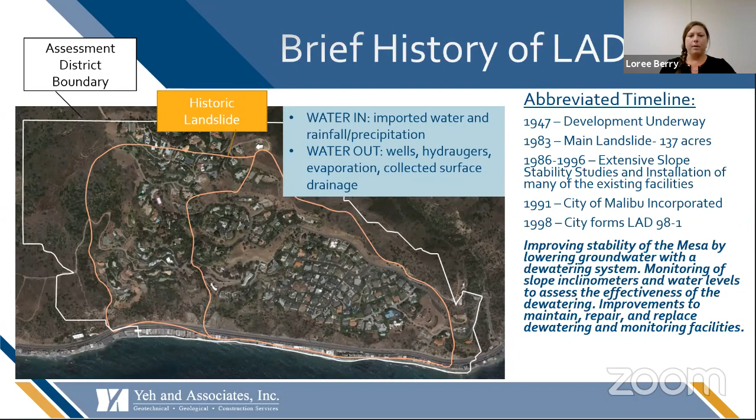A good point is that the whole idea of managing this landslide is controlling water in versus water out. The sources of water coming into the region are imported water and rainfall or precipitation. The ways we dewater and get water out of the assessment district are through dewatering wells, hydraugers, natural evaporation, and also surface drainage that's correctly and properly collected and taken down into the storm drain system.

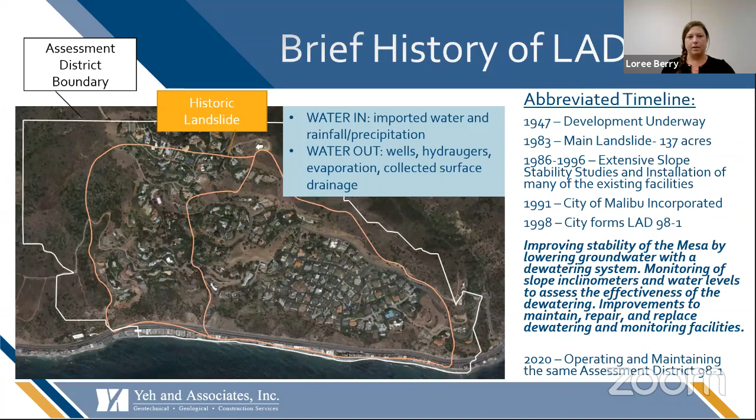Here in 2020, we are still operating and maintaining the same landslide assessment district with those same goals and purpose.

As Rob mentioned, Yeh was hired through a selection process through the city of Malibu and began our work in late June 2020, starting July 1st.

To that end, what we do for this project is monitor and measure the dewatering output. We measure the water levels throughout the district, survey the slope inclinometers, maintain and repair the equipment, and replace equipment under our allotted budget for capital improvement projects.

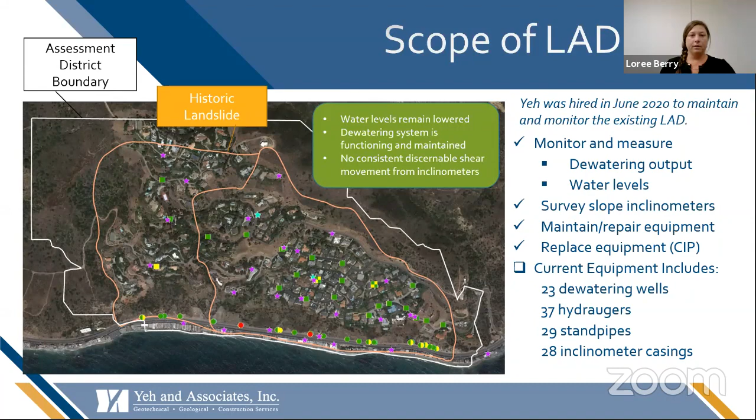Our current equipment includes 23 dewatering wells, 37 hydraugers, 29 standpipes, and 28 inclinometer casings. Based on the work we've performed and the data we've reviewed since coming on board, the water levels remain lowered, the dewatering system is functioning and maintained, and there's no consistent, discernible movement in the slope from the slope inclinometers.

We've been really busy - a lot of research, a lot of data review. We've been hiking through the district collecting information, not only to wrap our heads around this project, but also to provide responsible, educated answers to your questions and to keep maintaining and monitoring the project.

In these last few months, we've recorded the flow from all the wells and hydraugers, and measured the water from all the standpipes. We've done that for three months in a row per our contract - that's part of our scope of work every month, to do that basic measuring.

We also have to take water quality samples and submit them for environmental testing to comply with an LA Regional Water Quality Control Board NPDES permit, which has to do with the discharge of all the water coming out of the dewatering system and discharging it into the ocean.

So that is permitted by LA County, and we have to follow strict testing protocol to be in compliance with that permit. We also performed baseline surveys on the inclinometers.

We performed an inventory of the existing facilities. We've scheduled maintenance of some hydrauger conveyance lines that need repair along the PCH, and we've completed maintenance and repairs on up to 10 different dewatering wells. Those repairs are all part of the maintenance budget of the existing assessment district and within our scope.

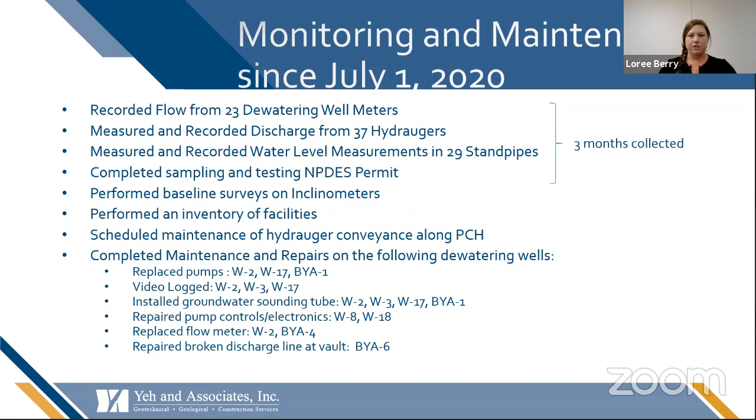So now I want to go through the results of our data collection and share some of the data trends that led me to the conclusions I've stated, and I'll state again, about the function of the system and the water levels.

So first I want to talk about the sources of dewatering coming out of the Big Rock Mesa. There are 2 different sources: dewatering wells, which are an active system that uses a submersible electric pump to lower and maintain the groundwater levels within an area surrounding the dewatering well.

Hydraugers, on the other hand, are the pipes you see sticking out of the bluffs along PCH. Those are a passive system, a horizontal perforated drain that's drilled into the hillside. When there is water around the drain, it comes out, but there's no active pumping - it's a passive gravity flow system.

What I do want to emphasize is that there's been trends over time showing less water is being discharged now than at the beginning of the landslide assessment district, but that does not mean the system is not working. In fact, when water levels decrease in the dewatering wells, it means there's less well surface area below the water table, so there's less area to recharge the well, and less dewatering volume coming out. That's a perfect example of water levels decreasing in a well while the dewatering volume lowers even though those water levels are being maintained low.

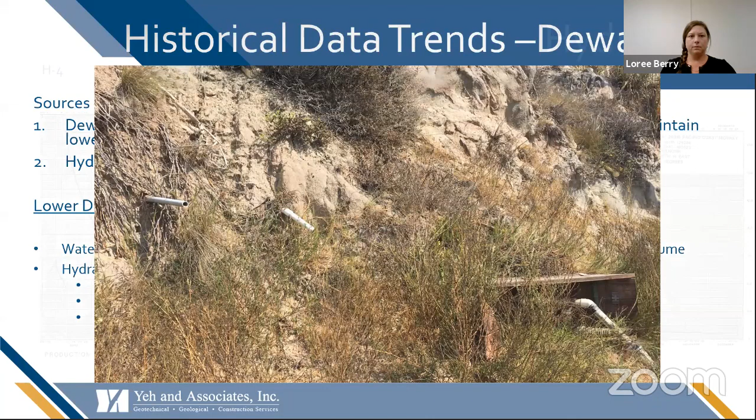Here I want to show some really interesting information. These are two examples of what I was talking about, where shortly after the hydraugers were installed, the production of water coming from it diminished very quickly.

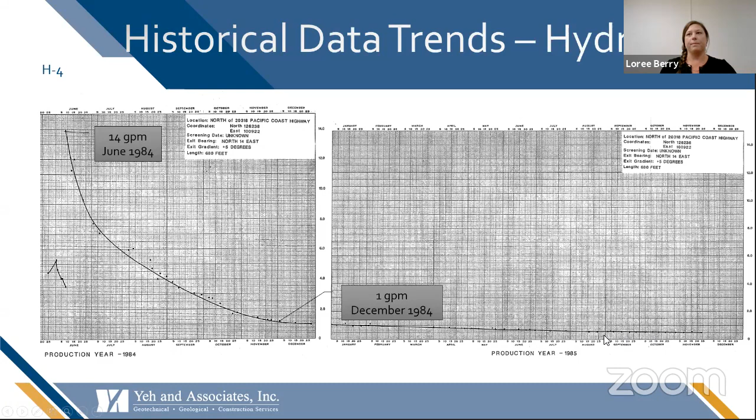This is H-4, a hydrauger we still monitor. It was installed in June of 1984 by D.A. Evans. At the time it was installed, it was pumping about 14 gallons per minute, even higher at the very beginning. Within 6 months, by December 1984, it had decreased down to 1 gallon per minute, and steadily stayed that way for the next year. That's still how it produces right now. So again, a very quick decrease after installation, a lot of water coming out of a confined area, and now it's just steadily in a low flow condition.

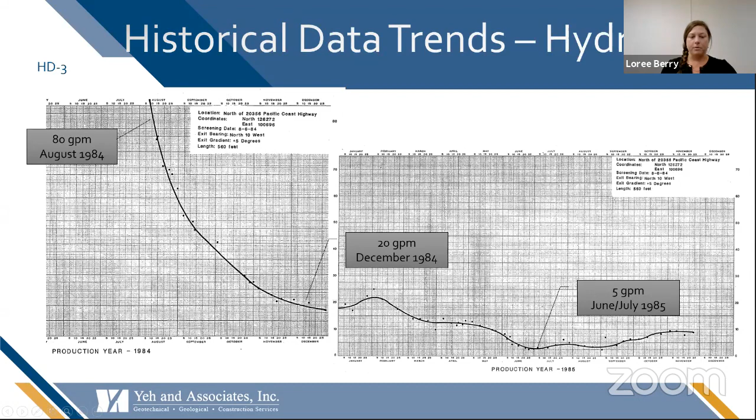I just want to show one more example of that. This is another one we still monitor, HD3. Again, very high, 80 gallons per minute when it was installed in 1984. By December, less than 6 months later, it was down to 20. This one shows an example of how some hydraugers are reactivated in response to rain - these little bumps are likely in response to different rainstorms. It goes up and down, hit a low spot of 5 gallons per minute, and this one also just stays low, like most of the hydraugers are relatively low flowing.

Another set of data that we look at is the trends in the groundwater levels. Reviewing the groundwater level data along with the results of the slope inclinometers is really our best tool right now for assessing how the system is functioning and where and how we should improve or repair things.

This table is a summary of some of the dewatering wells and standpipes. I took kind of a scatter across the district, and selected several within each subslide area, just to make the point that water levels when these were installed in the 1980s were very high, and they've continued to lower, and they're still lowered. As an example, in 1983 well number W1 was installed, and the earliest reading we have from 1983 was a depth of 63 feet below the ground surface. Now we measured it just last week and it's 125 feet, and that's consistent across the board.

With many of these facilities, you can see that they've decreased from their original water level at install to current water level. Some of them over 100 feet, 150 feet.

I also wanted to add that we took the time last week to take these water level measurements with the pumps turned off. By doing that, we wanted to see if there was much influence of the water levels with any nearby pumps. What we found was that we had readings from September for our monthly reading and compared them, and they're very similar. So in general, we don't see a significant difference with the well pumps turned off, and these numbers do represent a condition with those off.

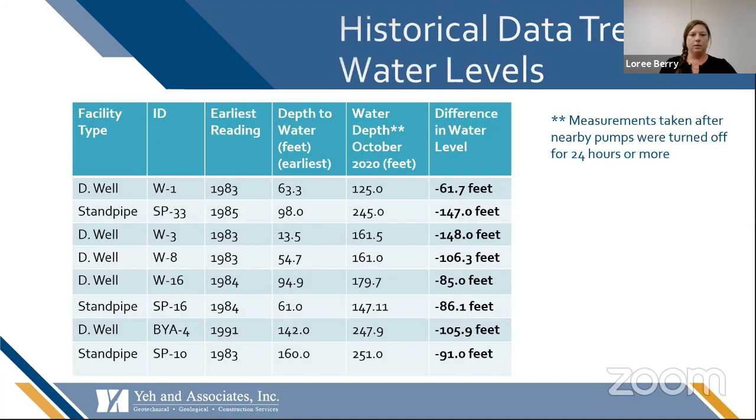Now we're going to start talking about - so I just talked about the two sources going out of the Mesa, the dewatering and the water level, or the two types of dewatering, and how we evaluate those by looking at the water levels. Here's another summary of one of the inputs to the system.

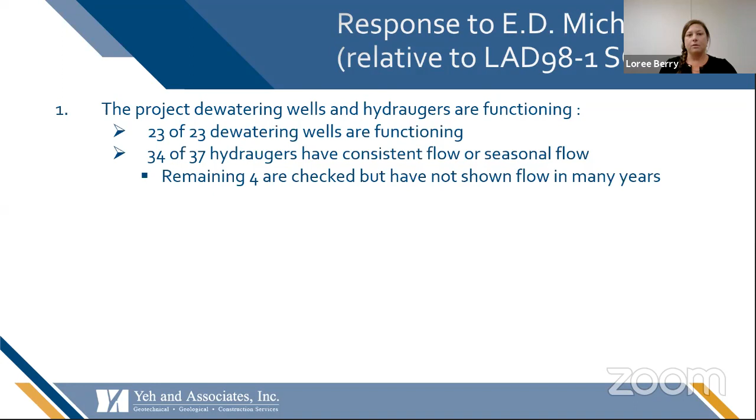The groundwater level measurements in the standpipes and within the dewatering wells, where we're able to get a measurement, indicate that the 2020 groundwater levels are well below the 1980 water levels before the slide activated, and are near or below the 1991 water levels once the initial dewatering systems were in and running.

Lowered dewatering production combined with the lowered groundwater levels tells us the dewatering system is functioning. In 2019, water usage is very similar to the water usage from 1984. And the slope inclinometer data does not reveal a consistent pattern of discernible shear movement.

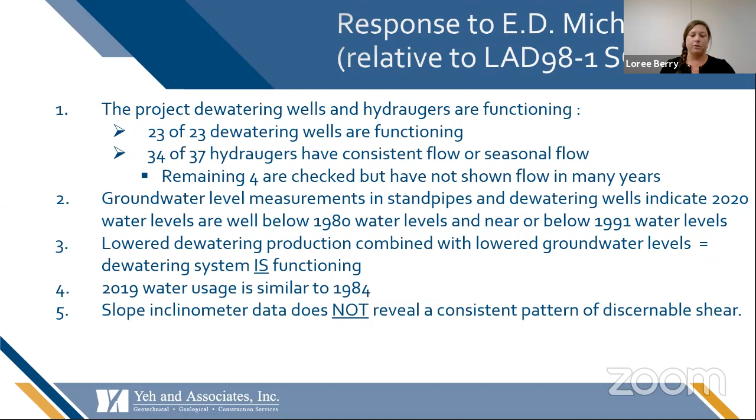So our next steps, which we will be implementing within our existing scope of work and budget, are to continue our monthly monitoring as needed, maintenance especially with the winter and rainy season coming up. We'll be keeping a close eye on any potential issues or repairs that are needed and address them as soon as possible.

We will maintain compliance testing and reporting for the LA Regional Board permit. We want to install pressure transducers in 6 locations.

This is going to come out of our CIP, our existing capital improvements budget. We want to do this so that we can continually monitor the groundwater levels through this next rain season, and it's also going to help us interpret whether some of the readings we're measuring are from a wet casing or an actual water level.

In the past, by just using a water level sounder, there's opportunity to get some erroneous readings, and there are several wells that are sometimes difficult to get good readings at. So those are the locations where we want to put these pressure transducers, so we can get a real, true groundwater level and a continuous level.

We'll be able to see changes from rain events and how the water levels react to those, and also the dewatering pumps, how they react to that.

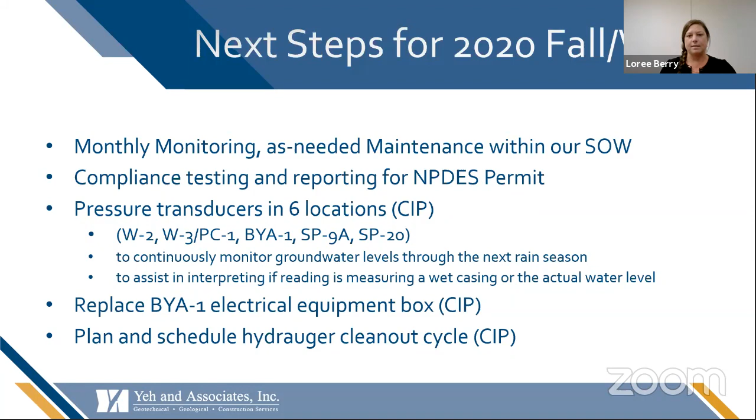This clean-out is just a maintenance item that's supposed to occur every few years, where we essentially jet clean out the hydraugers to remove some of that calcification and scale that builds up on them, so they have more opportunity to produce water.

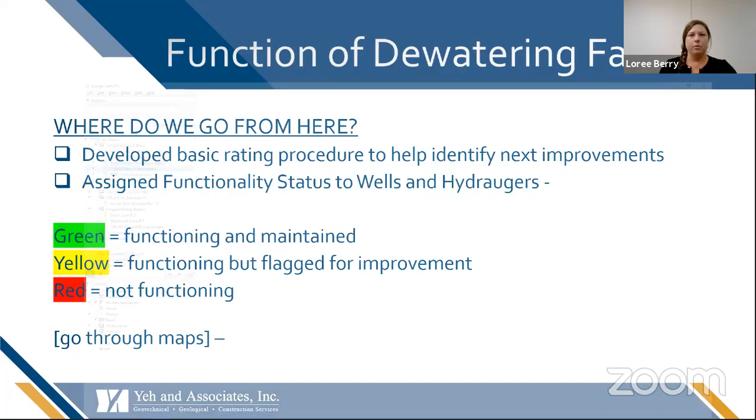So where we go from here, it's still kind of difficult to assess where and when and how to do the improvements. So what we did to help us was develop a basic rating procedure to identify where we want to make our next improvements. We've assigned a functionality status to the different wells and hydraugers. I'm just going to quickly go through this, not in a lot of detail, and we can go over it more in questions.

I've switched over to a Google Earth screen. Here I have the outline, and you can see our aerial view of the Big Rock Mesa. The white outline is the assessment district boundary, and the orangish line is the extent of the 1983 slide maps.

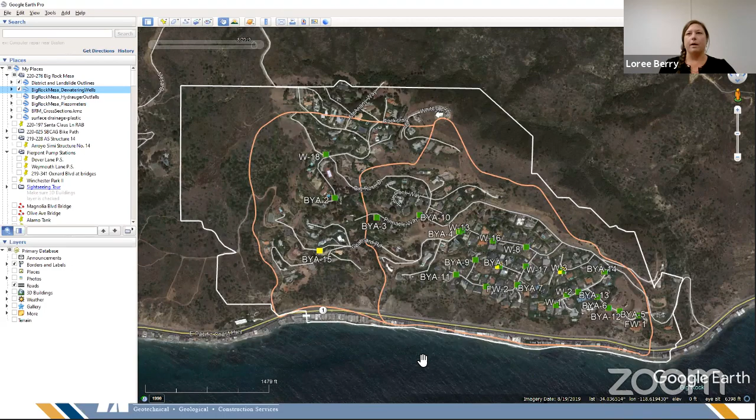And here are the 23 dewatering wells. They are color-coded green, yellow, and red. As you'll notice, there are no red because they're all functioning. Most of them are green. I'm going to first point out the yellow one.

BYA15 is a dewatering well in the Western Extension that was installed in 2002, and it's yellow because it historically hasn't produced much water, yet it was originally installed because of some concerns of water levels rising in this general area. Data shows that this area still has lowered water levels, but the pump is currently working in this dewatering well, it's just that the water level is below the dewatering well.

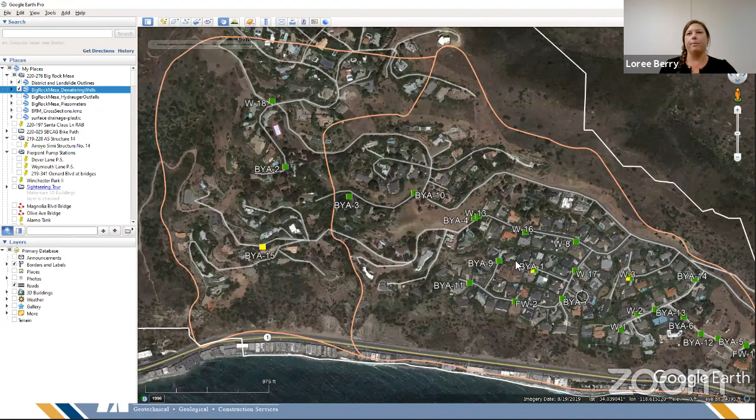Monitoring well BYA1 and dewatering well W3 here are kind of a checkered green-yellow. We did that because they are functioning, they have pumps that are running and they work, but they are flagged for some improvement. Both of these wells, based on our data, could be replaced with deeper wells so that we could dewater even further.

Right now BYA1 is pumping regularly. W3 hasn't had much production recently, but we have confirmed that the water level is right at or just below the pump intake.

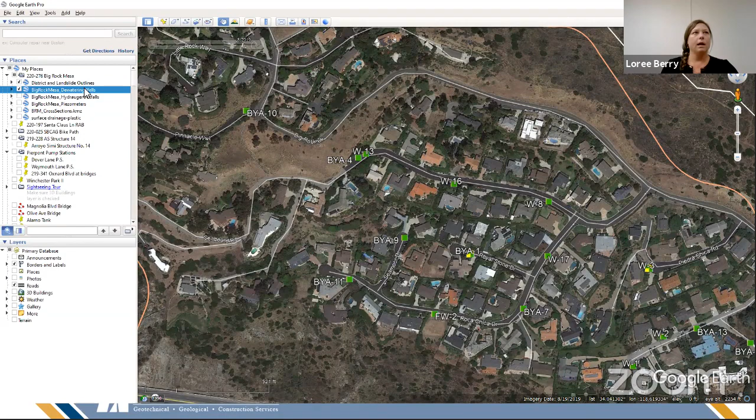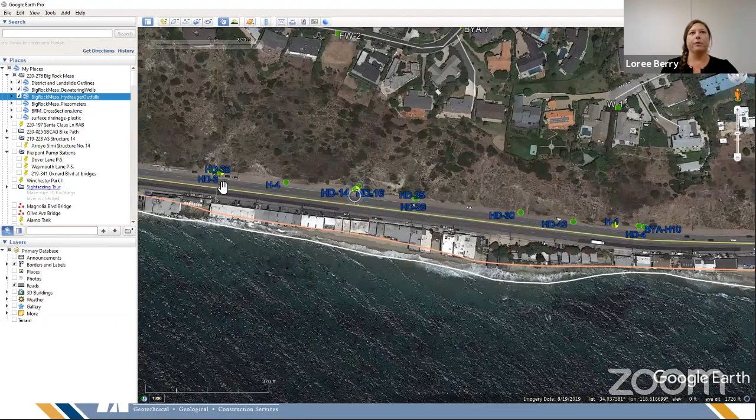Similarly, we did the same thing with the hydraugers, noting them as green, yellow, and red. The red ones are the 4 that really haven't produced in a long time, and we're keeping our eye on those. Some are green, producing really well and consistently, and the green-yellow ones are first in line for getting a hydrauger clean out because they produce periodically or intermittently, and maybe that can help improve them.

I want to point out that with this whole interface, we're working on a GIS interface where eventually, we're just kind of getting started, but I hope I can send you guys a KMZ type file from Google Earth, and you'll be able to click on these different points and get some basic information, the recent water levels and such, that we're trying to implement along with our other program.

So I'm going to go back to my slideshow. I'm going to go through a few facts about our 10-year capital improvement plan.

Some facts about our existing capital improvement plan: we currently have about $100,000 a year set aside for hydrauger clean out, major rehabilitation, or replacement of a dewatering well, hydrauger, or inclinometer. The costs of doing these types of repairs has skyrocketed, and you cannot do nearly as much as you could back in 1990, or even before that in the 1980s, when a lot of these original facilities were installed. Based on current pricing, we can really only do about 1 to 3 major improvements, about 1 improvement every 1 to 3 years based on this $100,000 budget.

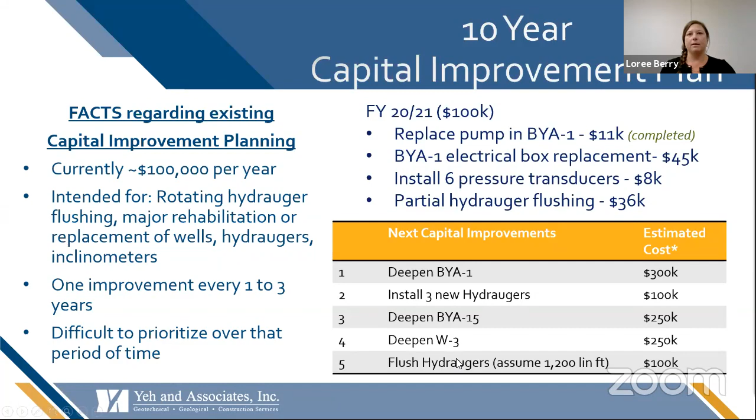So the cost to maintain the district is growing, and we can't do what we could do 20 or 30 years ago with the same budgets. We recognize the system is functioning and working, the dewatering and groundwater levels are maintained and lowered, but we do recognize there's room for improvement to enhance the system, to implement a better monitoring system, and to also implement newer and state-of-the-art landslide technologies.

I'm going to go through each option and provide the benefits for adding funds to the assessment district budget. I've listed these in order, where A is essentially what we feel is needed, a recommended approach. B and C are very important, and we would like very much to implement them — they would be a huge asset to the assessment district. Then going down into C, D, E, we start getting into improvements that would be really nice. They might reduce some labor or introduce remote capabilities, but they're not necessarily required to maintain the system.

So I'm just going to go through each of these one by one and share the benefits.

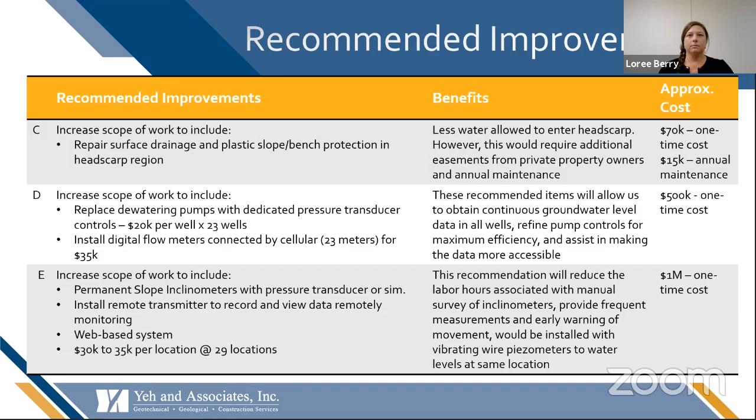October 12th is when we are going to be introducing this presentation and providing these recommendations to council, to give them direction on what to do moving forward. There could be some other recommendations coming out of those questions.

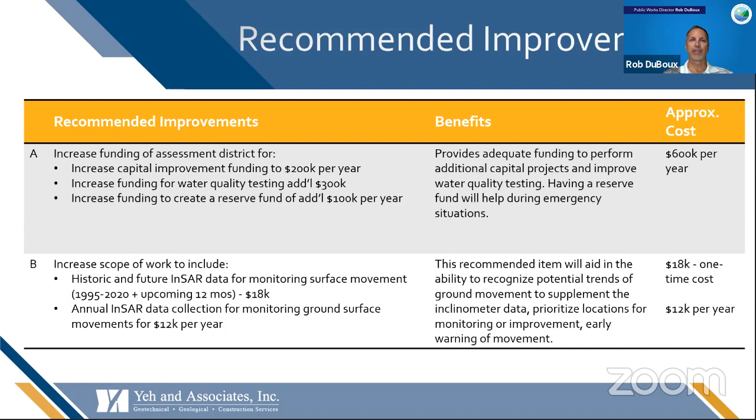We've received some written questions, and after she reads the questions, Loree, myself, and I think Nick is on here too, will be answering those questions. But just want to point out that if there's any questions not related to the assessment district and the dewatering and everything, we're not going to be answering those questions because those are related to the presentation and the information we're going to talk about today.

So with that, Brandy, do you want the first one? Yes, I'm ready, go ahead. The first question that was submitted is: what effect does the state of the drainage swales that are deteriorated and full of rocks, boulders, and brush have on the stability of Big Rock?

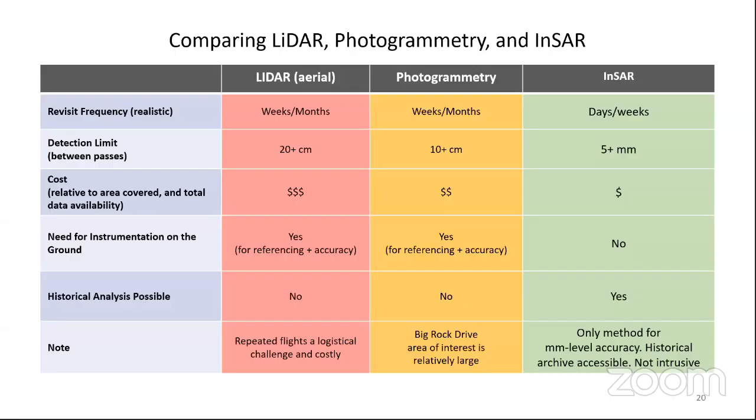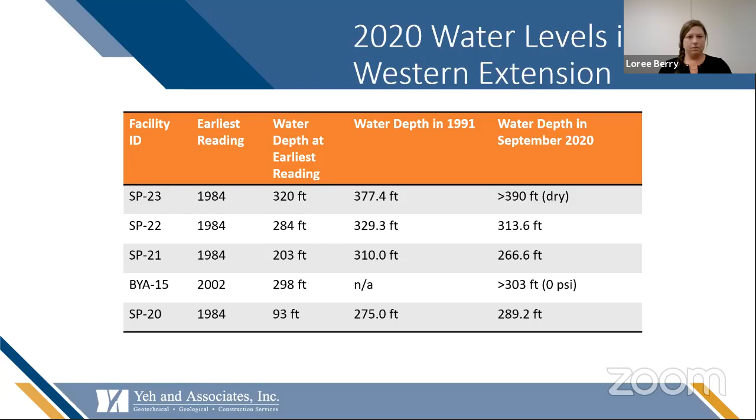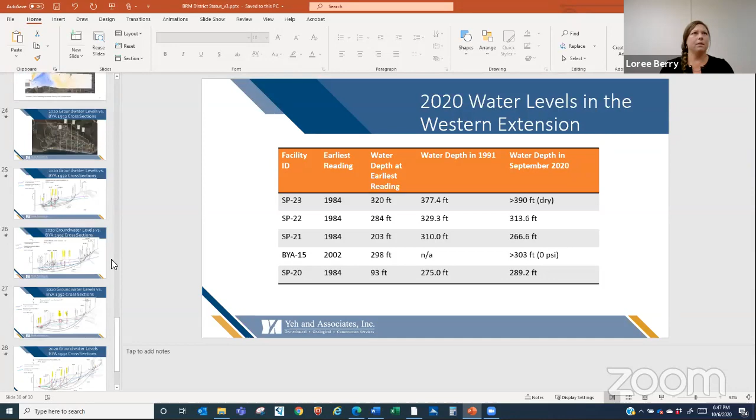Sorry, I touched on the concrete drainage swales, and they are part of our recommended improvements.

Currently, the concrete drainage swales and plastic protection within the headscarp region are not part of the existing landslide assessment district scope of work and facilities. Water entering that land area during periods of heavy rainfall is not favorable to the stability of the landslide. However, we are a little less concerned about the rocks, boulders, and debris, and more concerned about repairing the plastic sheeting on the slopes and terrace benches. It would be very advantageous to reduce the amount of precipitation entering the headscarp, and as I mentioned, it is part of our recommendations for improvements with a readjusted assessment district.

Next question: how many wells and hydraugers were not functioning at high levels when you inspected them? Are they now fixed and running at their full capacity potential?

Well, I want to first say that, just like a car coming off a car lot, a brand new car, a dewatering well or a hydrauger, any of this equipment, the second it hits the ground is not at its full capacity potential. There are so many variables with these types of facilities.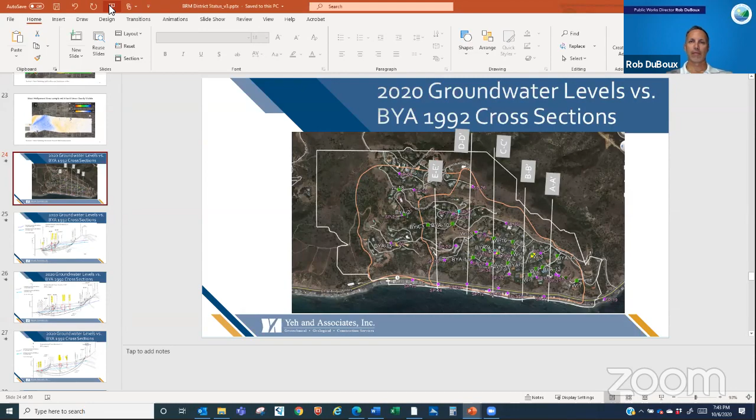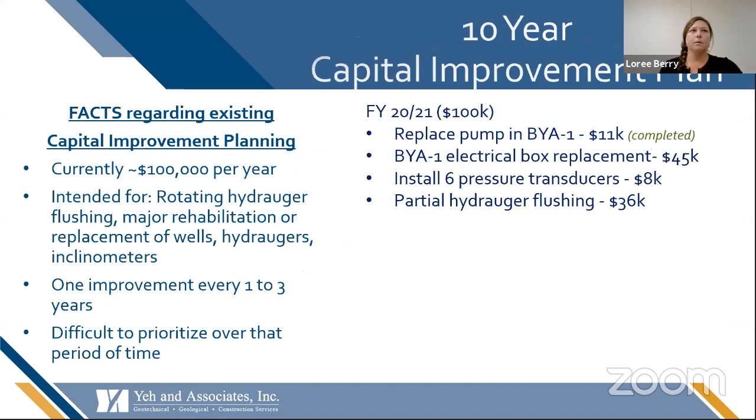Rob, I think this might be a good opportunity to share those cross-section slides. If you want, yeah, I'd like to share my screen again. That's fine, you should be able to. Just give me one second. Oops, sorry. I'll show you guys that too.

Slope stability — the dewatering has everything to do with slope stability. Slope stability evaluations were performed looking at scenarios at the time of the slide moving in 1983. The previous reports looked at conditions in the early 90s, once much of the dewatering system was implemented, assuming a best case scenario of almost the full capacity of what could be dewatered out on Big Rock Mesa. There are factors of safety cited in the Bing Yen 1992 report for all of those conditions.

You can all look those up, and I don't want to get into a lot of detail, but what I do want to show you is: if water levels are rising, it means the full landslide mass is less stable. If we keep dewatering levels low and well below the levels they were when the slide moved, and within the range capable by the dewatering system, then that's as stable as the slide can be with the equipment out there.

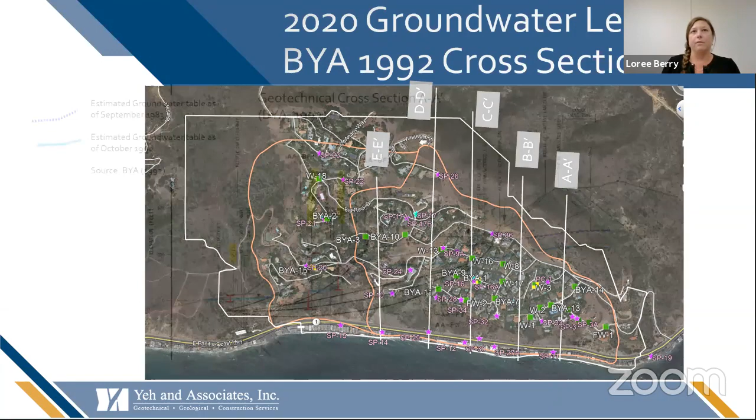So AA is the one furthest to the east. The dashed blue line is the estimated groundwater table, right from Bing Yen's plot directly, this is cross-section geotechnical cross-section AA.

In 1983, when the landslide was known to be active, the water level was modeled by Bing Yen here. A lot of dewatering went in, and the lighter blue line is the level the dewatering had achieved by 1990, 91, and 92 when they published their report, considering the slide dewatered enough to stop moving. These little sticks are different borings, core holes, or old wells at different facilities, and we don't have access to data from all of them, but we have it for a lot.

What's highlighted in yellow here is the water levels we obtained just in the last couple of weeks for these exact facilities that were present back in 91, which we're still monitoring. These red marks show the measured depth last week.

SP13 here on the coast, 22 feet below the ground surface, even below the levels from 1991. SP33, depth to water right now is 245 feet, well below the level in 1983, and even deeper than the level from 1990. Again, SP3, same thing.

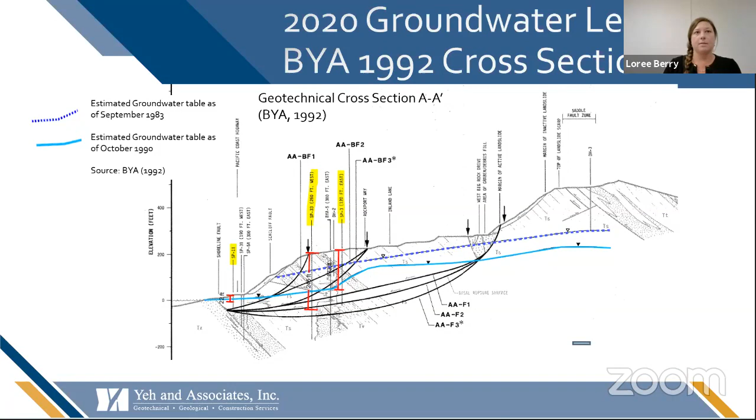Here in CC, it's kind of in the center, and what I want to point out is we have a point here that's well below the 1983 level. It's very close to the 1991 level.

The stuff along the coast appears to be below. We have 10 and 20 foot depths at SP12 and SP13 showing below those historic water levels.

Right here, these appear a little high, but this is dewatering well BYA1, which has been off for several months. Just last week, the pump was put back in, and only after a few days, the water level was at 133 feet, again well below the 1983 levels.

But the pump at this well is at 250 feet. If you measure 250, it brings us to about here. So presumably, and we'll keep an eye on this, the water level at this location, now that we have the pump operating through the winter, will continue to lower.

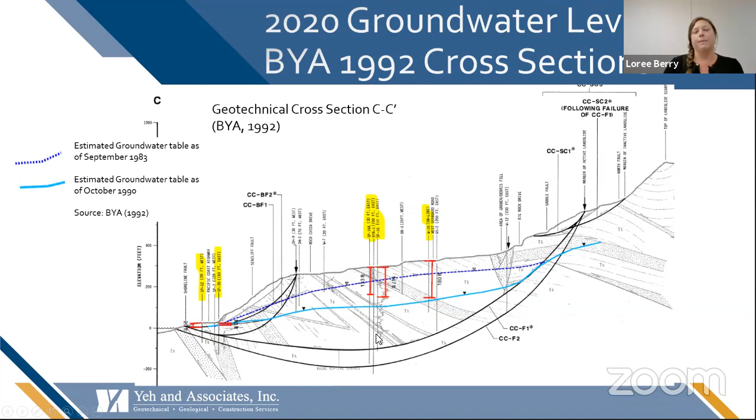I'll remind you that this is also the core location where we want to replace and deepen BYA1 as our number 1 capital improvement. So that is where we would potentially replace a well somewhere in this vicinity, potentially getting all the way down to here.

Here's a good example - cross-section DD, a little further to the west. In this case, we're seeing all the locations where we're able to get a recent water level, again just in the last week or so. All of them are below even the 1991 levels.